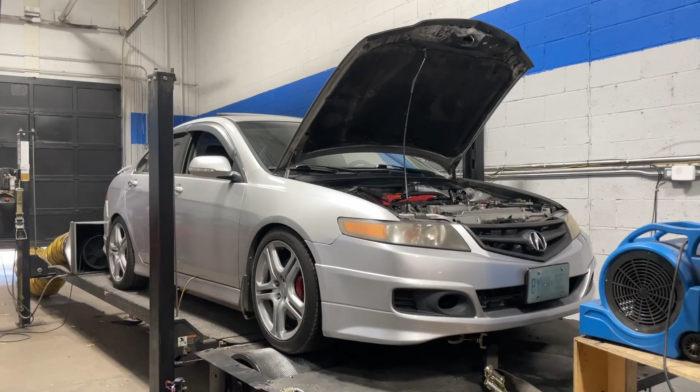Some of you guys might recognize this car. It has been on my channel a few times. This is Stefano's 2006 Acura TSX. It is a turbocharged TSX. The last time it was on the channel, it had a bunch of problems and we weren't able to finish the tune. He finally resolved all those issues. It was an easy fix ultimately, but then he drove it for a while and the turbo failed, so we got a new turbo for it. And we've brought it back for tuning today, but it has more weird problems.

But we were able to do a tune. I'm gonna share with you the results of the tune today. But first we're gonna go through all the details of the build like usual. I'll share some shots of the dyno pulls, and then we'll share the final results at the end.

All right guys, so like I said, 2006 Acura TSX. This car is running a Hondata Flashpro. In order to run Hondata Flashpro on these cars, we have to change out the ECU, so it does have a 2007 Acura TSX ECU and the Hondata Flashpro, and also the module to make the CAN bus communicate. That allowed us to tune this car because it is turbocharged. I'm gonna go through all the details of the build.

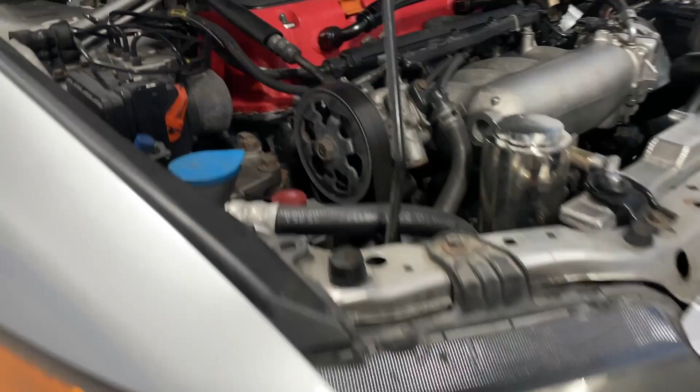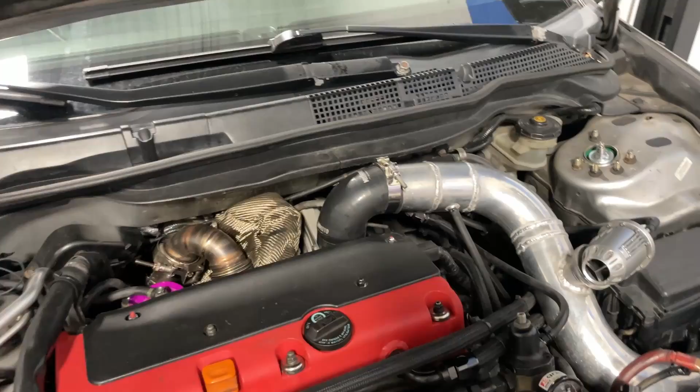This car actually has almost 400,000 kilometers on it. It's not the original engine anymore. It is a JDM K24A that the owner swapped in a while ago. It is a custom turbo kit. So we'll start at the turbo. It is now a Pulsar GTX 3584 dual ball bearing turbo, custom top mount turbo manifold. It has a Tial 44 wastegate, HKS blow off valve, custom 3-inch charge piping.

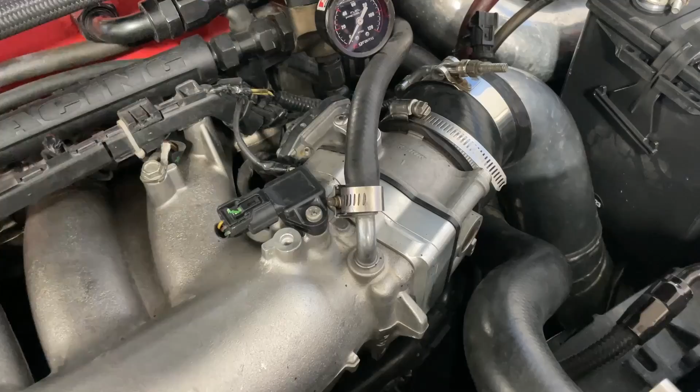It has an Acura RDX throttle body, which is giving us trouble. It would randomly throw the actuation error, so it's gonna have to be replaced. It also has an RBC intake manifold, 1000cc injectors. Stefano did install the RBC 50-degree VTC cam gear so that we would have full VTC range. It does have a RSX Type S oil pump in the engine.

The fuel system has been converted to a return style fuel system. It should have plenty of fuel. It has a Walbro 450 pump in the tank. It has a -8 feed and I believe a -6 return, but for some reason we're running out of fuel today. We're gonna get into that in a moment. It is running our Petro-Canada 94 octane pump gas.

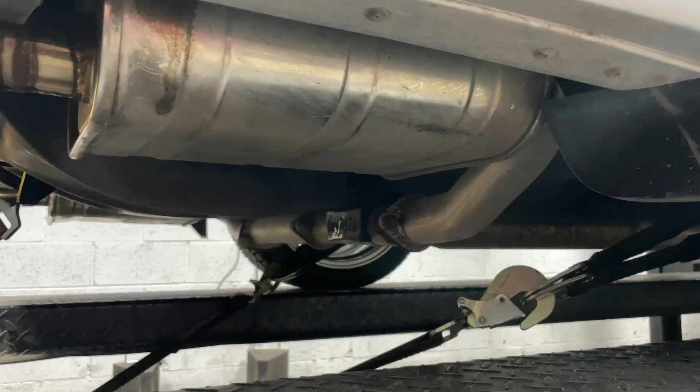Actually, one thing I almost forgot is the exhaust system. So it does have a 3-inch downpipe and 3-inch center section, but at the back, it actually is using its original Invidia Q300 dual exhaust system that it had when it was NA. So up until the split back here, it has a full 3-inch exhaust, and then it has the Invidia Q300 mufflers, which are not that high flow, and they're only 2 3/4, but still made some good power today. Just wanted to add that because I nearly forgot to mention it.

There is a MAC valve installed as well, and we're using the Hondata Flashpro to control boost. We did run 2 boost levels, so it basically had wastegate spring pressure, which is about 6-7 pounds of boost, and then we also ran a peak of 12 pounds of boost today. So I think that's about it for the build. Why don't we cut to some shots of the dyno pulls, and then I'll share the final results at the end.

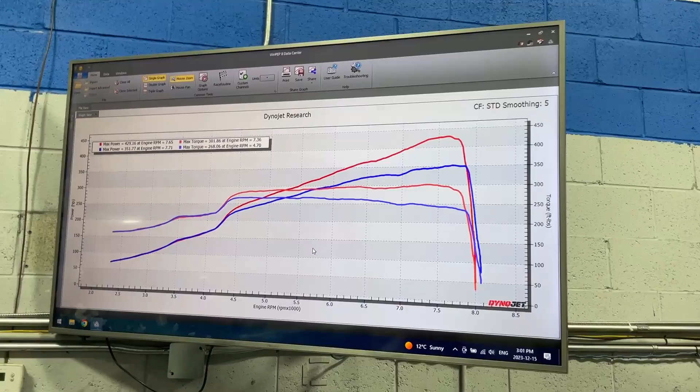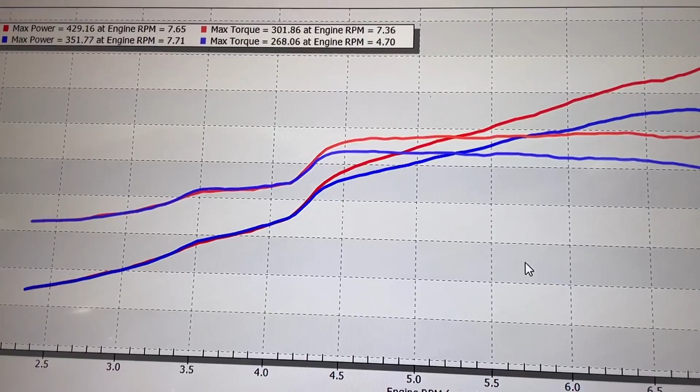All right, guys, hopefully you enjoyed the dyno pulls. Up on the screen, I have the 2 boost levels we ran today. In blue is about 6, almost 7 pounds of boost, and it put down 351 horse, 268 foot-pounds torque. Then in red, with the boost controller on, we hit about 7 pounds of boost at VTEC engagement, which is about 4,200 on this setup. And then I ramp in boost to 12 pounds at red line, which was about 8,000 RPM.

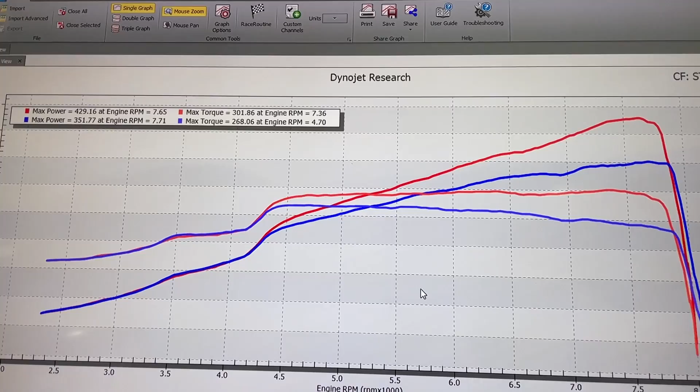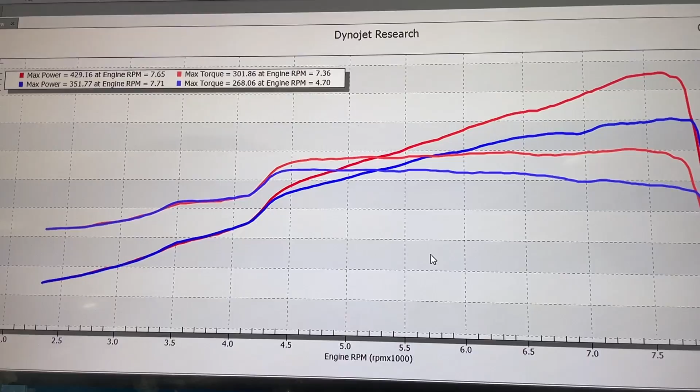The issue is, as we got above about 8-9 pounds of boost, we were starting to see a drop in fuel pressure. So there's some sort of issue with the fuel system where it's running out of flow. Even though it has a really big pump, even though it has a Dash 8 line, it should have more than enough fuel. It's actually hardwired, so it has a relay. We don't know what's up with the fuel system, but it's losing fuel pressure, and it stopped us today.

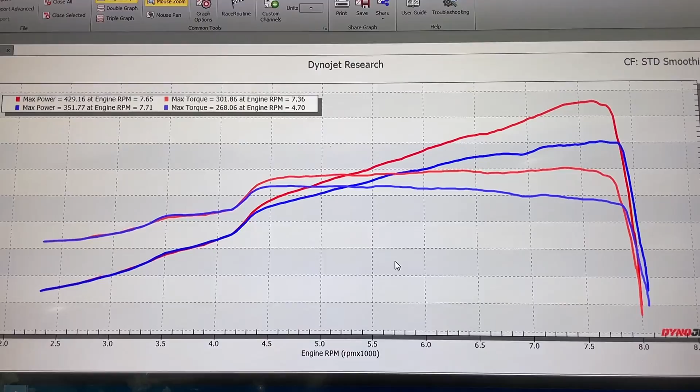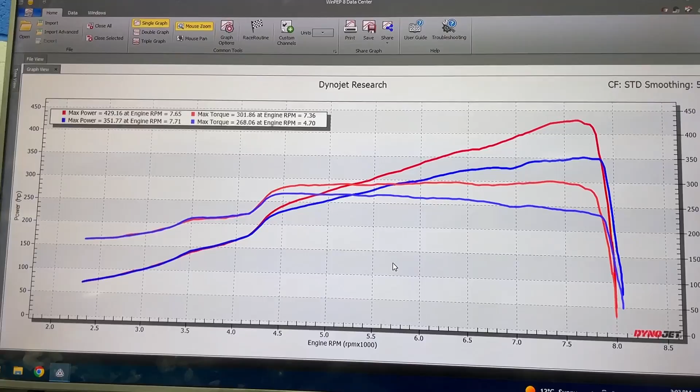The goal was to try to hit 450 on this setup, but we were running out of fuel, so that stopped us. So basically, I think it was actually 11.7 pounds of boost. It made 429 horse and 300 foot-pounds torque, and we had to stop. So today we had an issue with fuel pressure. We also had an issue with the ZDX throttle body. These throttle bodies tend to draw too much current and cause a problem, and then the ECU freaks out and puts it in limp mode.

So he's gonna get a new throttle body. We're gonna see what's up with the fuel system, and it seems like the turbo needs an oil restrictor. It's smoking a bit. It's actually a pretty common problem. Too much oil pressure in these turbos causes oil to seep out past and out the exhaust side, and it burns. And when you're in full boost, you can actually see a bit of haze. So I don't know, bunch of issues still to resolve on this car.

It's a good thing Stefano's a good friend of mine, because it has been nothing but headaches with this car ever since we started working on it. But I'm glad to see it's sort of working better and he can enjoy it a bit. And hopefully over the winter, he'll finally sort out all these issues, and he'll bring it back, and we'll turn it up even more and make another video for you guys.